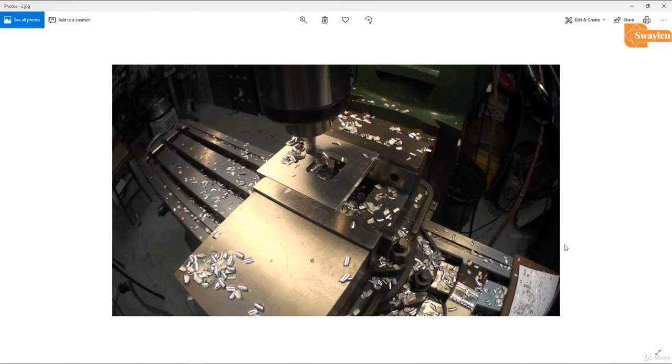So I have some images. See, this is the facing operation. This is the pocket milling operation. You will see, this is the pocket milling.

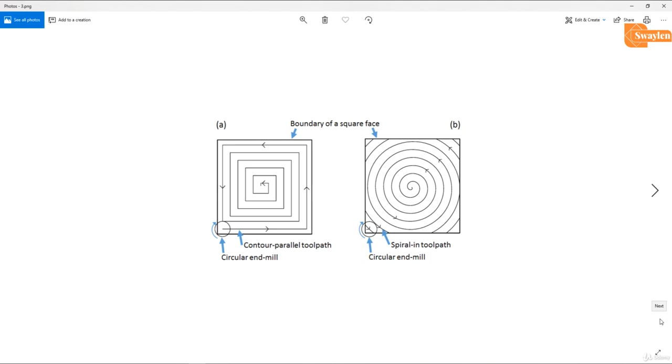Next, in contour operation you will see two paths here. The tool is a circular end mill in both, but first the parallel tool path and second the spiral tool path. Now we will see contour operation. So this is the contour operation, meaning your selected shape.

Okay, so now we will perform the facing, pocket milling and contour operation in MasterCAM. First we need an object. So I have an object. We will see the polygon radius is 100, the rectangular shape is 75 by 75, and the rectangular shape radius is 10. So now we will create this shape in MasterCAM.

So click on MasterCAM, wireframe. Now first we draw the rectangle. So rectangular shape: set a center origin, width 75, height 75 and fillet, click on center and OK.

So you will see. Now we will create the polygon. Set your side and radius, fix your value and click your center point. OK, so now you will see our object is ready.

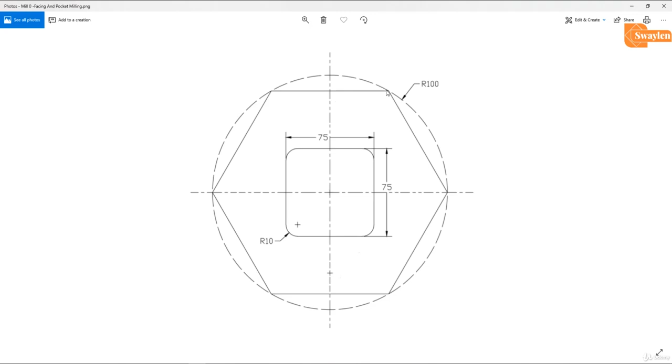Now we will apply the stock, meaning the circular boundary. So normally click circle, center point, and give any corner of the polygon. Okay, for isometric view, Alt+7. You will see our object is ready.

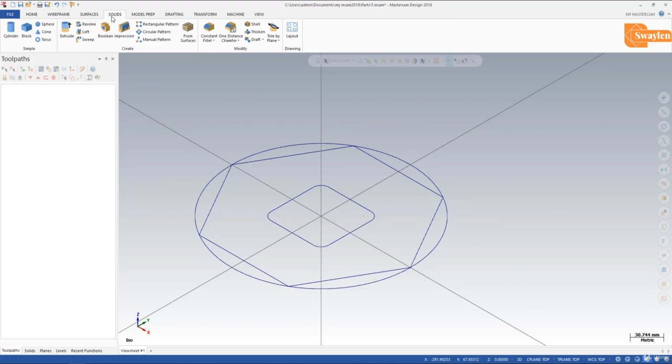Now convert to 3D. So click on solid, extrude, select your chain, OK, give your value like 30 in reverse direction because we need this sketch.

Okay, so now we will perform the operation. First we select the machine, mill and default. So click on this plus, stock setup.

Now you will see our stock is circular shape. So click on cylindrical, and our stock height is Z axis. So axis is Z, and select all entities. OK, so our stock is ready, you will see.

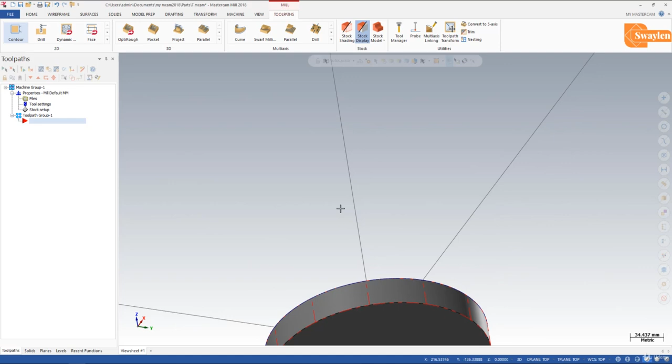Okay, so Alt+7. Now we will perform the operation. Our first operation is the facing operation. So click on face, select chain, now select your chain, OK.

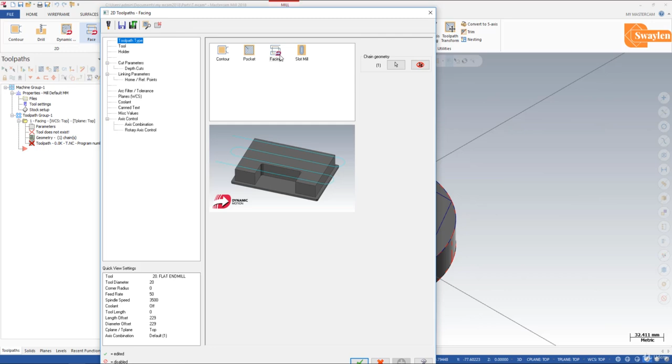Now your tool path selection. Our tool path is facing. Now tool selection, so click on filter, the end mill, and OK.

Click on select library tool. So this is the end mill. Now select your flat end. I will select the 10 diameter tool.

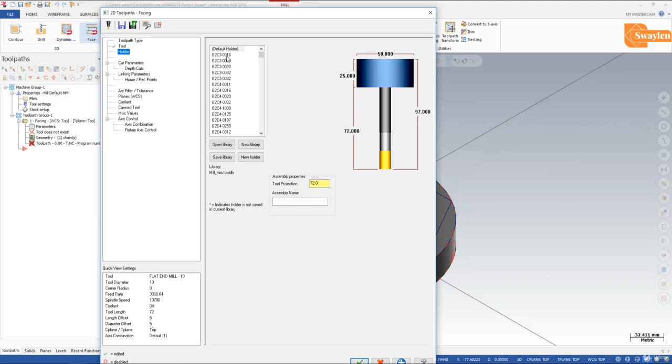OK, now the holder selection. So click the first holder, B2C3-0016. Now the cut parameter.

You will see many types of style here, like one way, zigzag, one pass, dynamic, but we will select the zigzag view. No, we will select the one way. And the stock to leave on floor, I will set to 0.

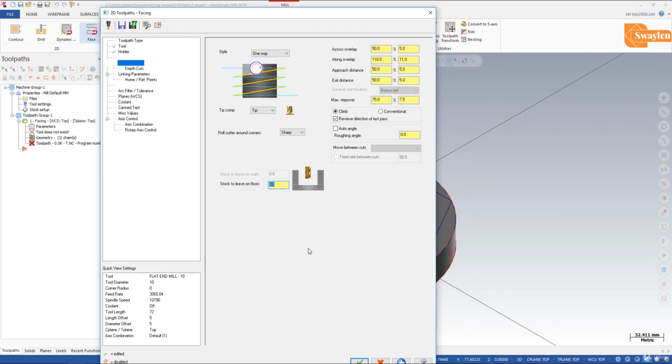Next is depth of cut. So give your depth of cut here. For a rough cut, give a value like 0.5, and the finish cut is 3, and the value is 0.25. Now the linking parameters, so first is depth.

So first is depth, give your depth like minus 10, minus 5. Now top of stock is 0. Select your feed plane, I will set 5, and the retract value is 15.

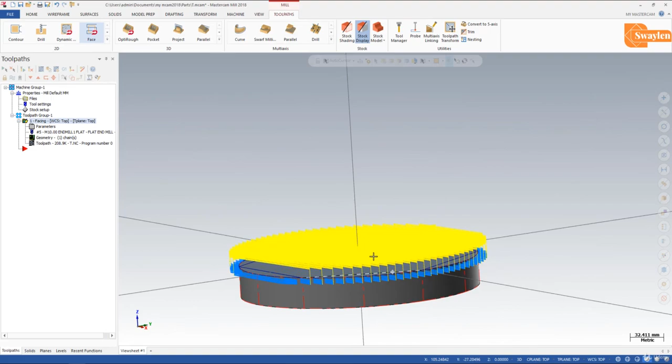So OK, and you will see your operation is applied. Now we will perform the pocket milling to cut this shape.

So click on pocket milling here. Click on pocket milling, select chain. So this is our chain. Click this operation, you will see, OK.

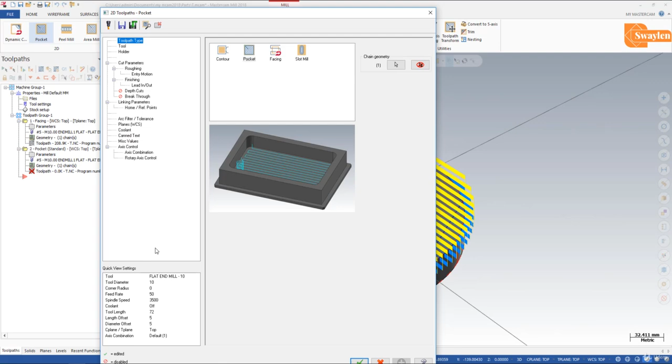Now our tool path is pocket tool. So select your tool, I will select the filter again and the end mill. OK, so select library tool. I will select the 5 dia tool. OK.

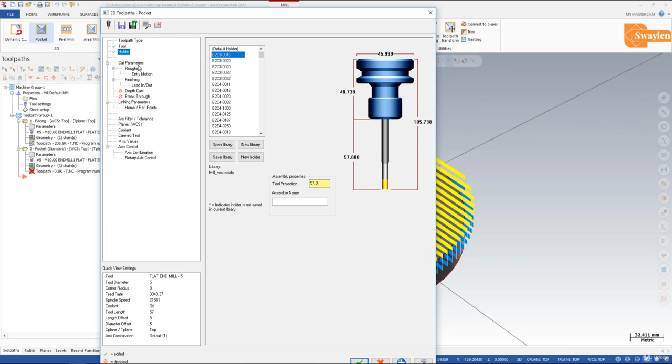Holder: B2C30016 holder. Cut parameter: I will select this stock to leave on wall, meaning this one is 0, and stock to leave on floor, meaning this one is 0.

So the roughing means the position, you will see the path: zigzag path, constant overlap, zigzag path, parallel spiral, constant overlap spiral, but we will select the parallel spiral. So the entry motion is helix. You will see the off, the ramp motion and the helix motion. We will select the helix.

The finishing value is already here. Lead in/out, give your depth of cut. So I will give the depth of cut for pocket milling: the rough cut is 0.5, the finish cut is 3 and the finish value is 0.15.

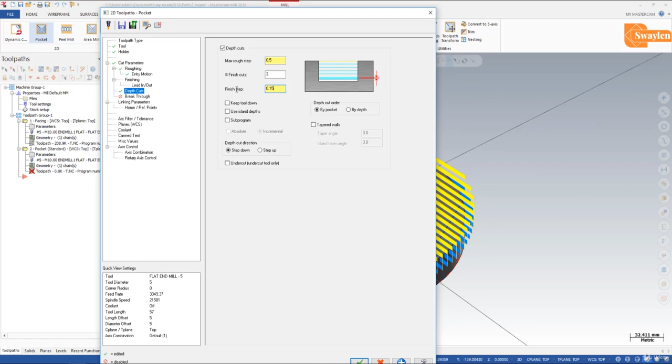So linking parameter, set your depth value to minus 10. Top of stock is 0, feed plane is 5, and your retract value is 50, and OK. You will see the pocket milling is applied.

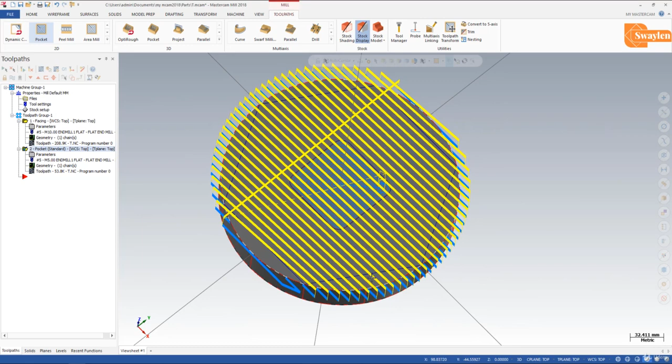Now we will cut the object by this boundary. So for this operation we will select the contour operation. Click on this arrow, and the first is contour operation. So click on this.

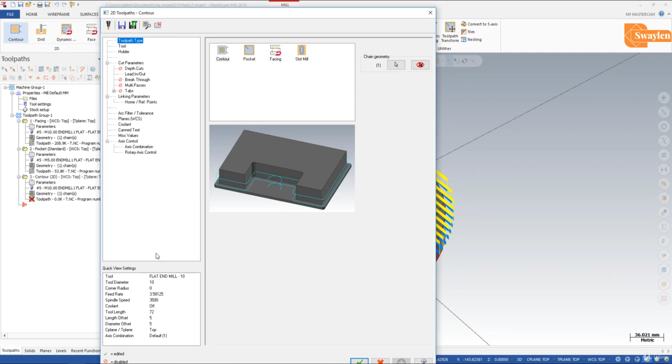Now select your chain, so we will select this chain, you will see, and OK. So now the tool path, so tool path is selected.

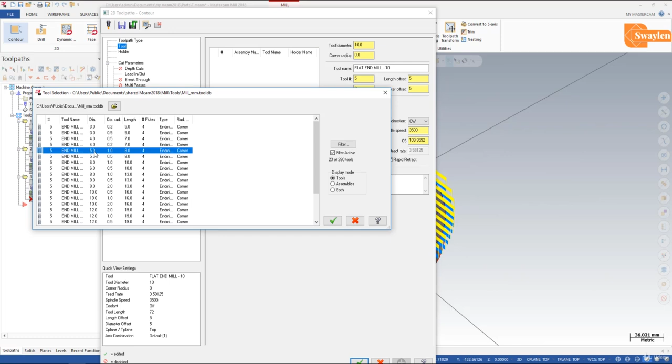Your tool selection for contour operation, select this one tool. So click on none, select this tool, OK. Select library tool and select your particular dia tool. Like I will select the 5 dia, OK.

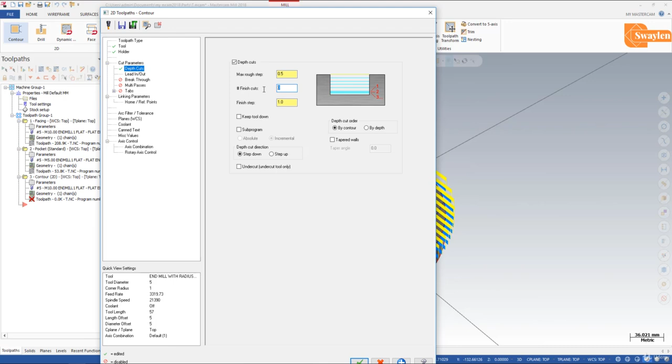Select holder B2C30016, the cut parameters, OK. The depth of cut, so click on depth of cut, set your cut like rough cut is 0.5, the finish cut is 3, and the value is 1.0.

Lead in/out, do not select the breakthrough, multiple passes, OK, and tabs. So in linking parameter we will set the depth of pocket, depth of contour.

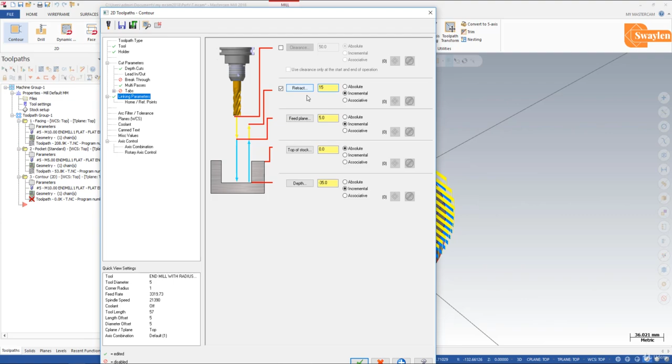So we will cut the whole object. I will select minus 35 depth, and the feed plane is 5, and the retract value is 15, and OK. So you will see.

So now we will check the operation in 3D view. First select all operations and click on verify selected operation. Click on verify selected operation. So now you will see, first in top view and second in isometric view.

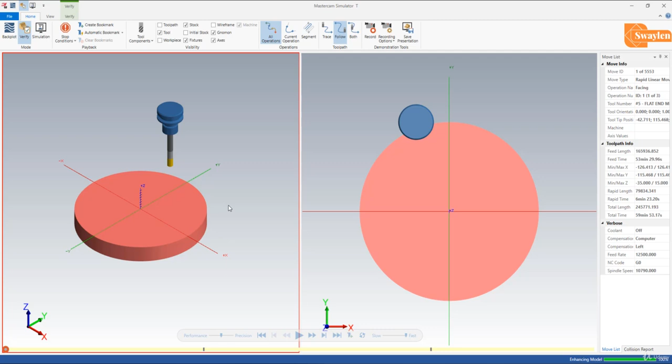Click on play. Our first operation is facing, second is pocket milling, and the third is contour.

So you will see, I will show the wireframe view. See, so our object is ready. So cancel this view.

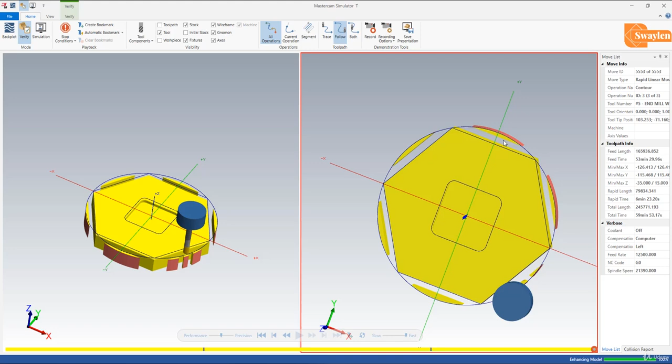If you want to generate the code, click this option and save file. So this is the facing, pocket milling and contour operation.

So friends, after completing the operation, the object looks like this. You will see. So this is our operation, and our object is ready.

In the next lecture, we will discuss the facing operation, contour operation and drilling operation. Thank you.